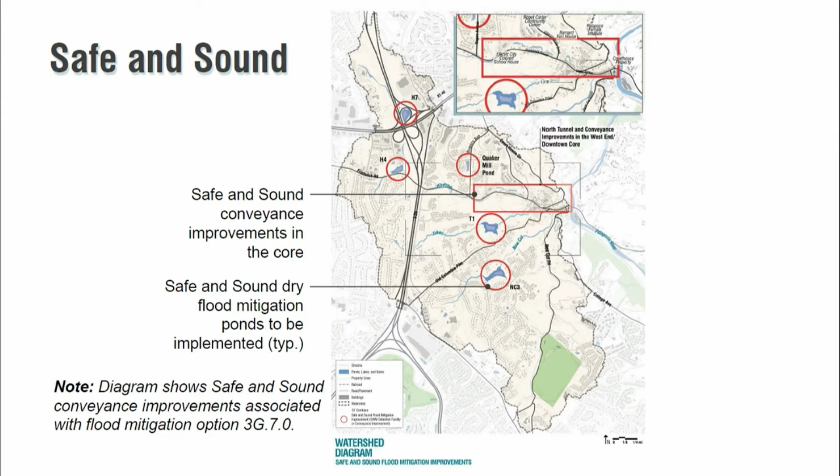This is just a map diagram showing some of the locations of the Safe and Sound conveyance improvements. The core, the rectangular box, is in the core area, including the tunnel as well as other conveyance improvements in the West End area. Then we have the dry flood mitigation ponds circled in red throughout the watershed. These are all the improvements associated with the selected 3G 7.0 concept. There are some other improvements, such as the Church Lane storm drain improvements, that aren't identified here but are included even though they weren't part of Safe and Sound.

The vision statement - the part in blue is what we had left off with last year - is that Ellicott City and its watershed is a model resilient community that thrives by protecting its people, commerce, history, culture, and natural environment.

We've added in, enhancing its vibrant and authentic character. As we looked at input and talked with more stakeholders, we had a lot in here about protecting what's here, but we really weren't capturing that we want to enhance what's here as well, so we added that into the vision statement.

Goals 2 through 6 continue over from where we left off, but we added in goal number 1, building off the safe and sound approach, protecting our residents, employees, and visitors. These goals permeate through all of the recommendations in the plan.

Now I'd like to hit the plan frameworks, these 5 main categories we'll go through, with a couple slides on each one. We're calling these frameworks because these are all aspects of the plan that are interrelated to each other.

They don't necessarily apply to one geographic area. Some of them, such as parking and flood mitigation, what you do in one area will impact decisions you make in other areas. So we wanted to talk about these more in terms of networks, so you have this framework in mind as we talk about specific areas.

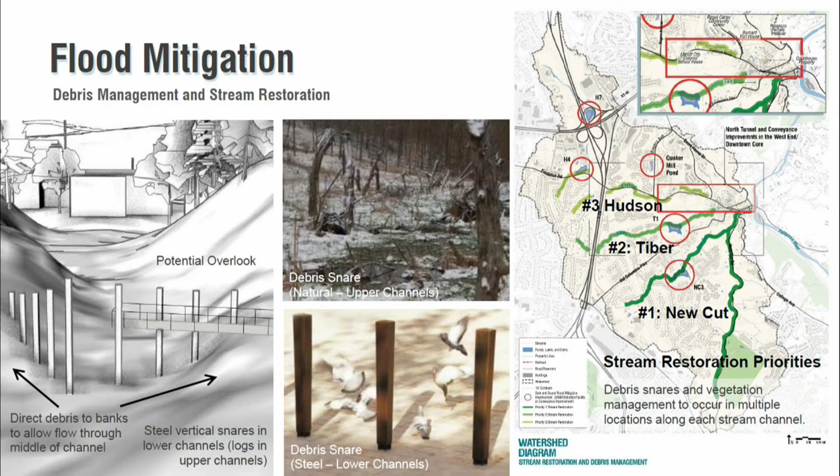With the news we saw yesterday that the Wilkins Rogers Mill site will be closing, there's an opportunity to perhaps explore a sensitivity analysis in the area of the Patapsco River. Looking at historic photos we shared in a previous presentation, the mill site has been expanded over the years.

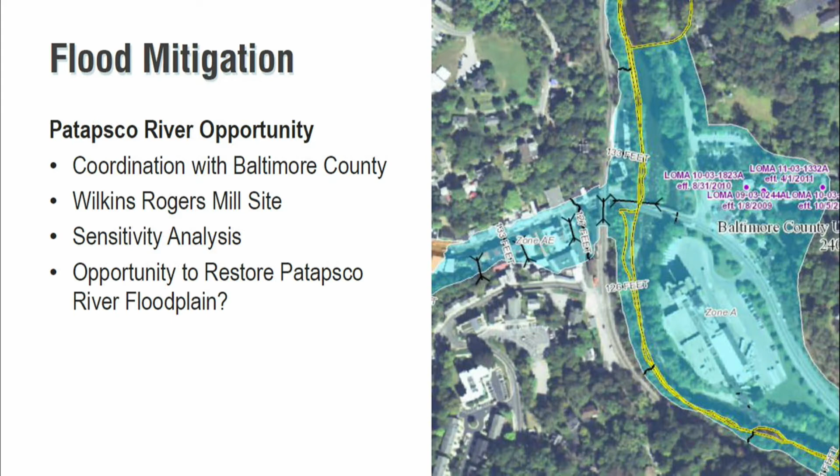In terms of environmental sustainability, we've established several guidelines here. First, uncover and restore streams that are piped below ground wherever practical, and we'll show some of those currently culverted where we see an opportunity to daylight them. When planning improvements, increase green space where possible, and employ permeable surfaces, including pavement and other green infrastructure, wherever they could best achieve environmental goals.

We've heard a lot in the online engagement about permeable pavement. One of the challenges in this watershed, especially in the core, is the granite bedrock, and permeable pavement's not going to work everywhere.

But we certainly want to, where it can work, especially in the lower part of Main Street where there's more fluvial soils, maybe in Lot D where there was a broader floodplain at one point in time and the channel has changed course over the years, there may be some opportunities to do that.

Increasing tree canopy wherever possible, aesthetically integrating environmental site design features into the surrounding landscapes, and not just treating these as engineering feats, but looking at how, where we do incorporate microbioretention, rain gardens, and other techniques, how could they really be incorporated into the landscape as an aesthetic feature as well as a functional one.

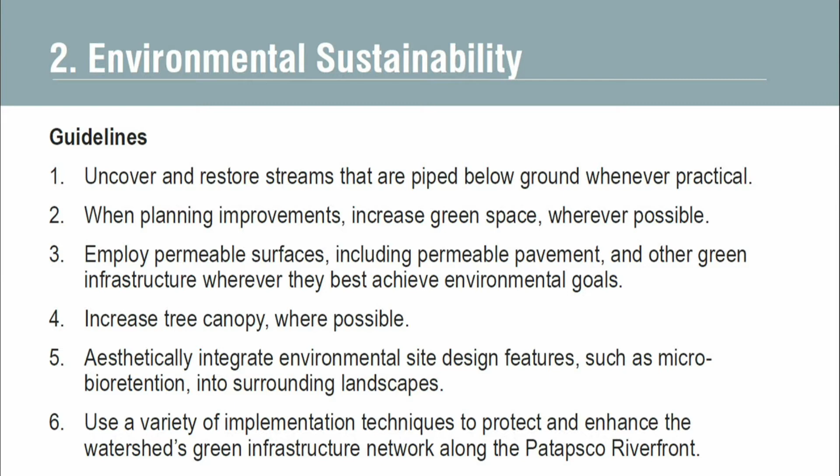And then using a variety of implementation techniques to protect and enhance the green infrastructure network along the Patapsco Riverfront. So just a number of things that we'll show where some of these might be applicable in some of the plans we're showing, but there are opportunities for green roof, permeable paving and bioretention, increasing tree canopy.

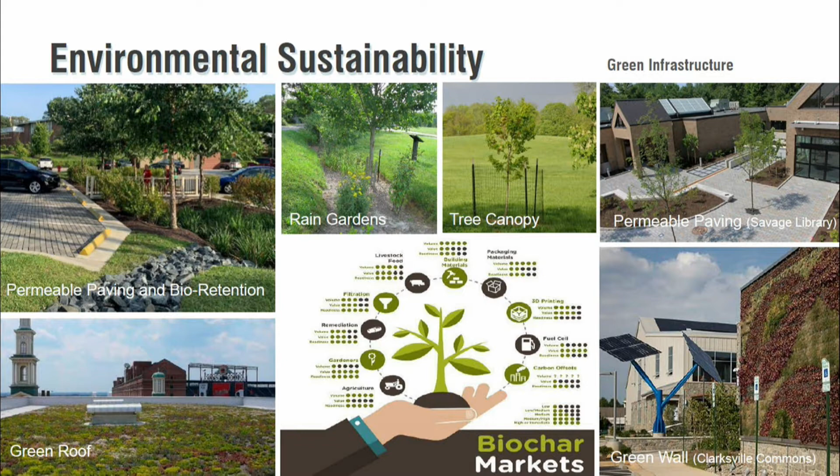We know EcoWorks and Lori Lilly are working with some, looking into biochar, the use of biochar to mix into the soil. And then green walls and pervious paving, some examples that have been done in Howard County. So we'll point out specifically where we see some opportunities.

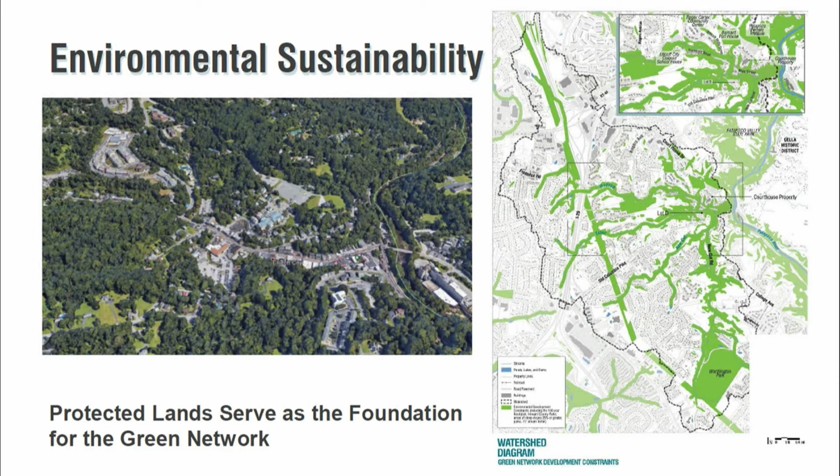And then expanding the green network wherever we can. The green network that's shown is what's currently protected lands, steep slopes, floodplain, stream buffers along the tributaries. But how can this serve as a foundation then to expand that network?

As we look at transportation and parking, for transportation, really supporting alternative ways of getting around, not just focusing on the car, but bicycle, shuttle, and really improving the walkability of Ellicott City, especially within the core, and connecting neighborhoods to the core. Making the experiences for pedestrians more enjoyable than they currently exist, and that includes ADA accessibility and more space to move around, more pedestrian area to navigate.

Making the sidewalks more accessible, linking nearby neighborhoods to downtown with pedestrian and bicycle routes. That's something we heard a lot about over the past 2 years, especially for the neighborhoods that are on the outer edges of the watershed.

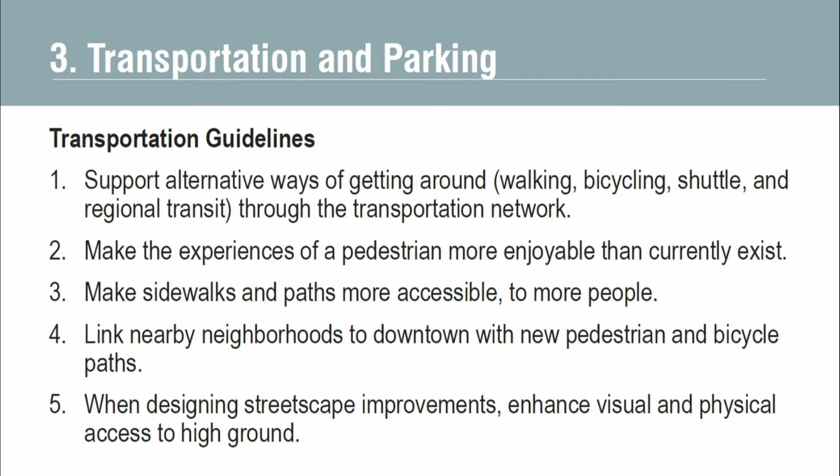And then when designing streetscape improvements, really enhancing visual and physical access to high ground as part of the safety and routes when there is a flash flood, very visible routes to the higher ground.

So looking at the broader watershed, this is based on some input from over the past couple years in a series of meetings, but along Frederick Road, Old Columbia Pike, New Cut Road, and College Avenue, where there aren't sidewalk connections out to the further reaches of the watershed, really looking at how do we extend the sidewalks and pedestrian network out there.

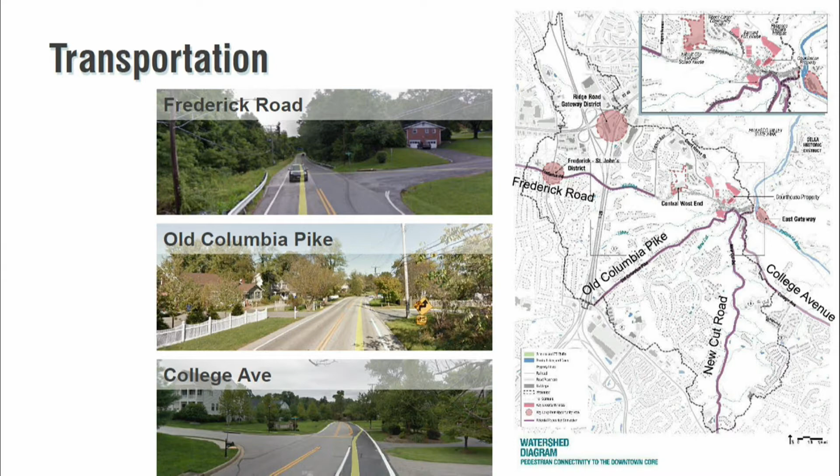One, making the core more accessible to people that live in the neighborhoods, helping to eliminate the need for driving into the core, but also just improving the health and livability of the neighborhoods.

As we look at parking, we want to be comprehensive in the overall parking strategy and considering alternative ways. So not just think in terms of parking spaces and parking lots, but what are some of the other systems that support that parking management, the use of a shuttle, making the experience of walking from the parking areas more enjoyable so that people aren't moving their cars around so much.

In the near term, restricting on-street parking where the flood risk is greatest, and then if on-street parking is restricted, accommodate those short-term needs with drop-off, loading, and delivery functions. Over time, locating most off-street parking out of flood-prone areas, and while the location of parking may change over time, planning for the overall parking supply to meet the typical demand.

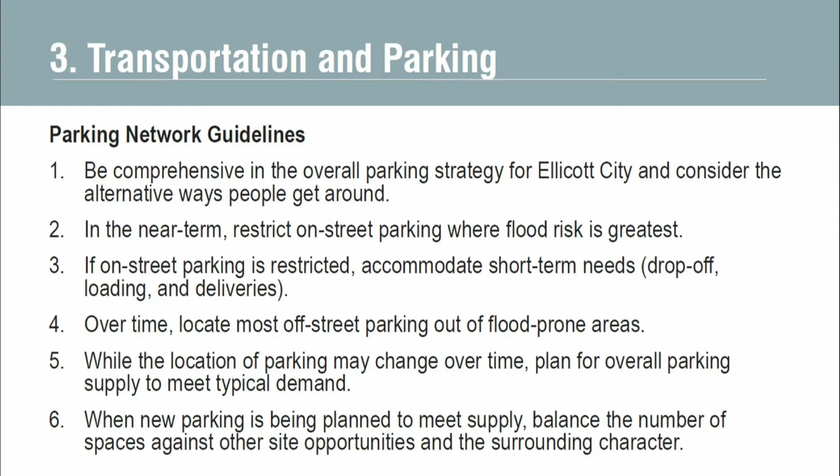And then when new parking is being supplied, balance the number of spaces against other site opportunities and the surrounding character. So as we get into that, it will make a little more sense as we get into some of the specific areas and looking at some of the alternative scenarios we have.

But just looking at the parking network at a very broad scale, if we look at the core area, we have about 900 spaces existing in the core. The red areas are areas that are potential areas for reduced parking for a number of reasons.

Along Lower Main Street, that reduction is because we still have the potential with safe and sound of over 3 feet of water in a flood like 2018 or 2016 in Lower Main. And through FEMA's research, 6 inches of water can get to the undercarriage of many passenger cars, stalling them out. 12 inches can float a car, and 2 feet of rushing water can move a car, even an SUV.

So the county is very concerned about safety. There are a lot of issues with cars jamming the culverts and so forth. So really looking at some restrictions along Lower Main Street until flood mitigation can be in place.

Lot B, that's going to be an area where we can, we'll talk more about this, that's going to be offline for construction of the tunnel exit from the tunnel outfall in the Patapsco River. So we want to look at some potential loss there.

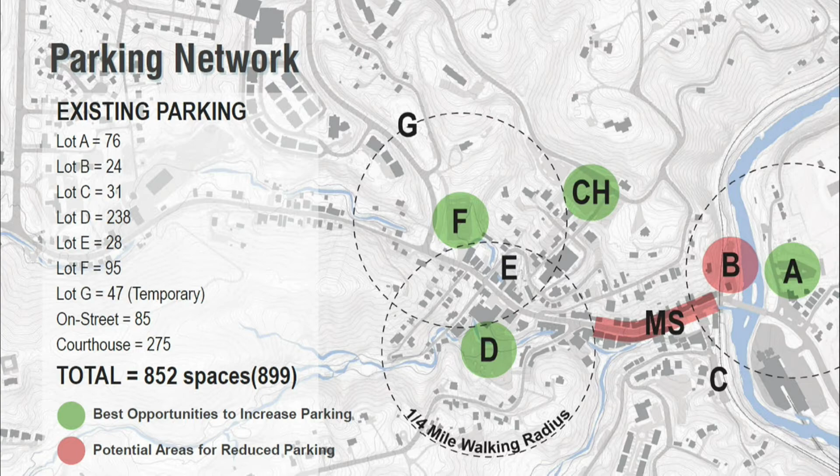The areas highlighted in green, particularly Lot A, Lot D, Lot F, and the courthouse, are really the areas where we have the ability to expand parking resources so that we can have an overall, not a net loss, but just the locations of parking resources may shift a bit. We'll talk in more detail as we get into the area plan.

As part of the network, as part of this comprehensive plan, we're looking at a number of things. A shuttle—a lot of communities are doing a shuttle, and this can't look like the shuttle bus that goes to the local hospital or mobility transit. It has to be fun, something open, something contemporary.

The top image is from Greenville, South Carolina. This is a privately run shuttle system that goes up and down their main street. And then at the bottom image, we're looking at how you can possibly even brand a shuttle here. We heard a lot about building a funicular, and that may not be feasible here, but maybe the shuttle has a fun way of being branded the funicular for Ellicott City.

Other things we talk about: valet parking, especially with the Uber trends we're seeing, drop-off and pickup becomes more important than sometimes parking, but also having valet. The bottom left is in the Hampden neighborhood of Baltimore, where on weekends they implement valet parking.

And then looking at some restricted parking on the signs that maybe in the flood-prone areas of Lower Main Street, it's loading and unloading—perhaps a 15-minute limit for just convenience, run in and get a cup of coffee or pick up something. Maybe once flood mitigation's in place, we start with 2-hour restricted parking, and that may expand to paid parking for the most desirable spaces.

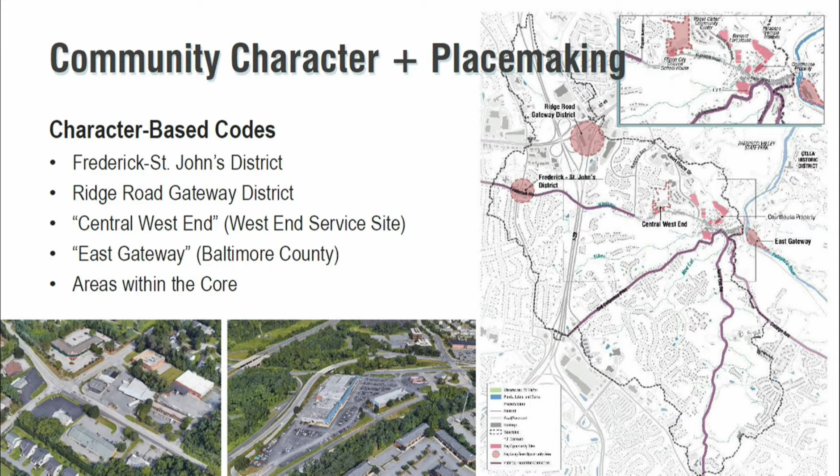And then also in some key redevelopment sites - there's no intention to redevelop these now that we're aware of - but at Frederick and St. John's, the commercial district there in the lower left, and up at the Ridge Road Gateway District, if these sites are ever redeveloped, developing them in a different way that creates more walkable places and reflects the character of the district.

Also looking at guidelines in the character codes that's starting to design buildings to fit the site rather than the site to fit the architecture.

So those are things the character-based codes can get into, to really look at the architecture fitting the sites. And then looking at the open spaces.

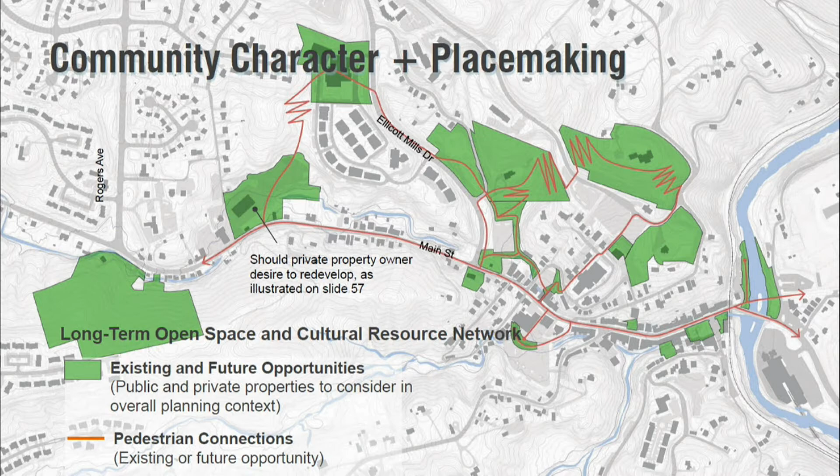This shows in green a number of open spaces, both existing and potentially new ones, and cultural resources such as the Patapsco Female Institute, the Roger Carter site, the Barnard Fort House, and so forth, along with some new open spaces associated with flood mitigation in Lower Main. We need to look at the master plan to connect these comprehensively with pathways and open space—a green network—so they become part of an overall network rather than a bunch of individual sites.

And lastly, under character and community character and placemaking, we want to make sure that wherever we're making projects or implementing improvements, we look at how we can make these great places to be, activating them with the right uses, allowing events to occur, and taking advantage of the intrinsic qualities of these spaces. So with that, we wanted to have ten minutes of Q&A on some of these topics, if anyone had any questions or comments on these broad guidelines.

Again, we'll keep these guidelines in mind as we go through the individual sites.

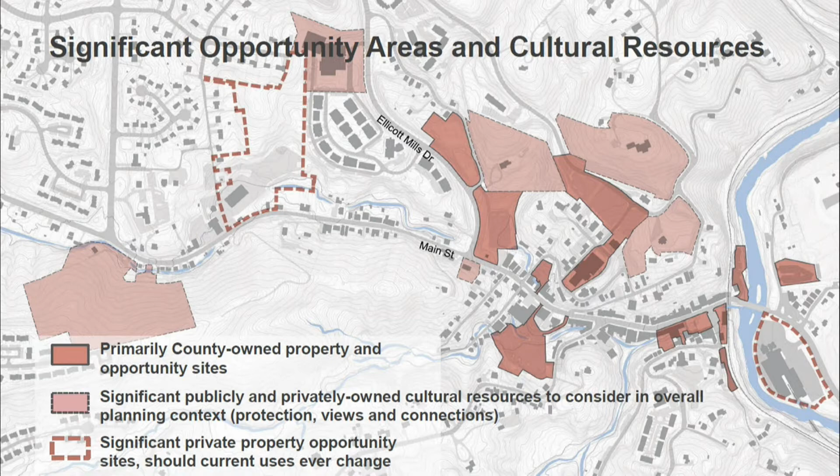A year ago, we didn't anticipate that mill would be closing so soon. We had always identified that as a far-off opportunity, but it's something we need to keep on our radar right now. So we're going to go through each of these areas.

We'll start with Streetscape and then start at the West End and work on down to the Riverfront.

With the Streetscape, some important guidelines we want to have here is that we want to really design the streets, sidewalks, and those associated pedestrian areas to be simple, consistent, and authentic. That's very important in the historic district - they're not trying to be something that isn't Ellicott City, that they're consistent throughout and there's an authenticity about them.

But we also want to use flood resilient materials and construction methods. So the timing of the streetscape with the flood mitigation projects becomes very important as to what the materials are.

And how they're constructed. We want to integrate visible and audible emergency alert systems into the design of the streetscapes. That's very important in conversations with the Office of Emergency Management, that these systems are incorporated, that they're not add-ons, but they're really thoughtfully incorporated into the street system.

And then we want to consider the potential impacts from storm debris in the design of streets, sidewalks, and the associated pedestrian areas. So, thinking about if storm debris comes down, how do some of these street elements keep them from going into the channels, or how are they anchored down so that they're not destroyed?

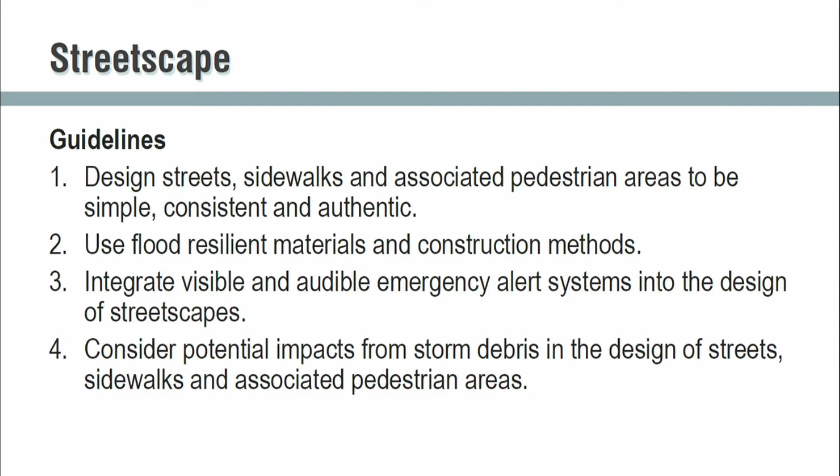This is a diagram that we had shared last year, looking at starting at the west end, expanding the sidewalks further along Frederick Road, improving some of the sidewalks. We heard a lot of desire to rename this section of Frederick Road to Main Street, so it's a continuation of Main Street, and Frederick Road may start at 29 and going further.

A traffic circle at Rogers Avenue to really create a boundary between coming in from the west - you hit Rogers Avenue at the traffic circle, and at the west end you're entering a new district - having a series of bump outs and crosswalks along here, introducing a number of crosswalk or traffic calming techniques throughout the west end.

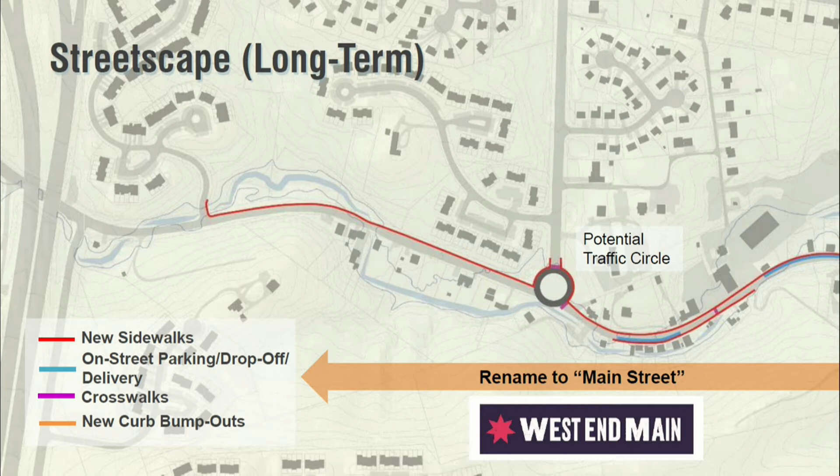That was something we probably heard most in our conversations with the residents of West End - the desire to slow traffic down through there and make it safer for pedestrians and parked cars in that area.

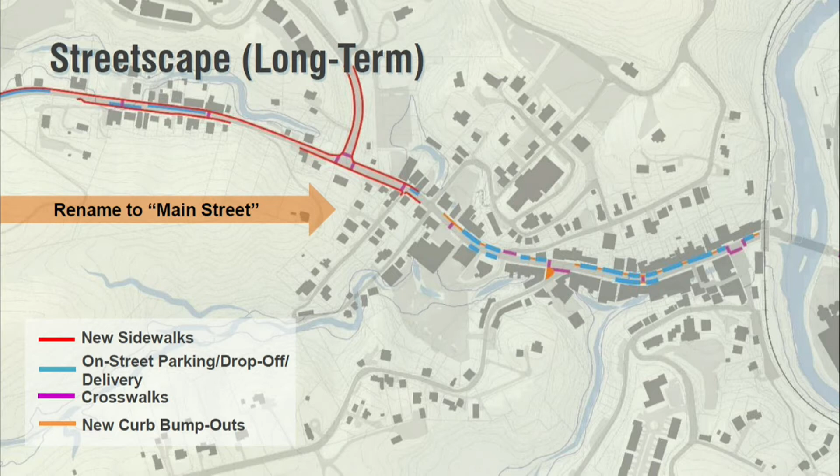As we move further into Main Street, again, continuing new sidewalk segments, and then showing areas in blue down in the core of areas on-street parking, drop-off, and delivery, introducing several mid-block crosswalks and better crosswalks at some of the intersections within the core, and then some new curb bump outs. We'll show more details of this as we get further into the planning.

In the West End, this was a sketch we had last year that hasn't really changed, looking at opportunities to create some bump outs, some raised crossings, crosswalks, create some safer parking zones, and then looking at alternating some of the parking areas.

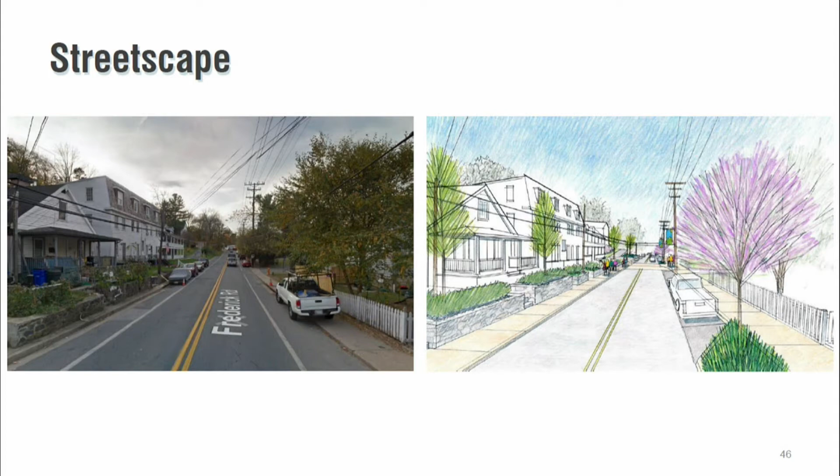There might be some areas where you could do it on both sides of the street, but in most cases it's probably going to be alternating because of the width of the street there.

As we look at the core, historically there's really a very simple geometry to the street in Main Street. There is the sidewalk zone, the parking zone, and then the travel lane zone.

And as we look at streetscape improvements, especially as we start to talk about bump outs and curb extensions, we want to try and respect this simplicity here and not have a streetscape that visually is going in and out and loses that simple geometry there.

So these are just very simple diagrams showing how if we do introduce bump outs, you can see the curb line introduced there, that the sidewalk materials may reflect what's happening in the drop-off or parking lane, or the parking drop-off lane could match what the sidewalk materials are. We'll show that in the next couple slides.

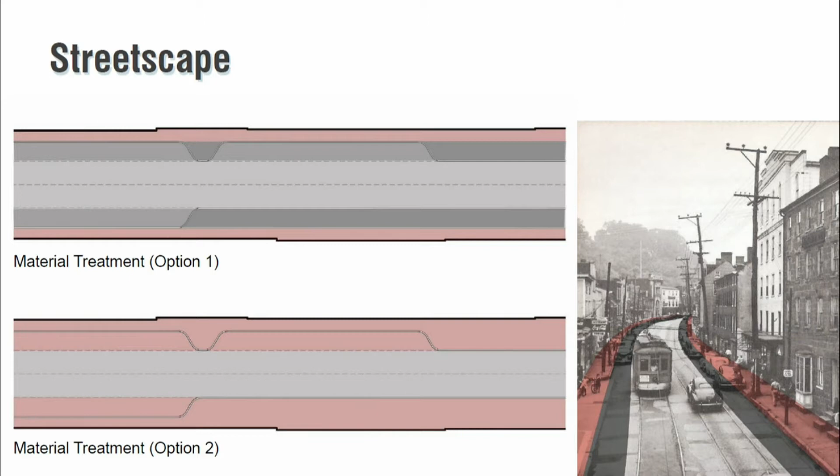This is a more detailed plan showing that before flood mitigation, we're really continuing to recommend the use of scored concrete with granite curb, to really withstand - they are more resilient to the flood waters than the brick. So any streetscape that's done before flood, before the safe and sound, we recommend concrete.

But this is an example showing how the bump outs and extended bump outs could be used to create some outdoor amenity space, some seating areas, and then define some of those drop-off, pickup, and valet areas. And then the paving of that drop-off zone might reflect the paving of the sidewalk area so that we maintain that simple visual geometry along the side.

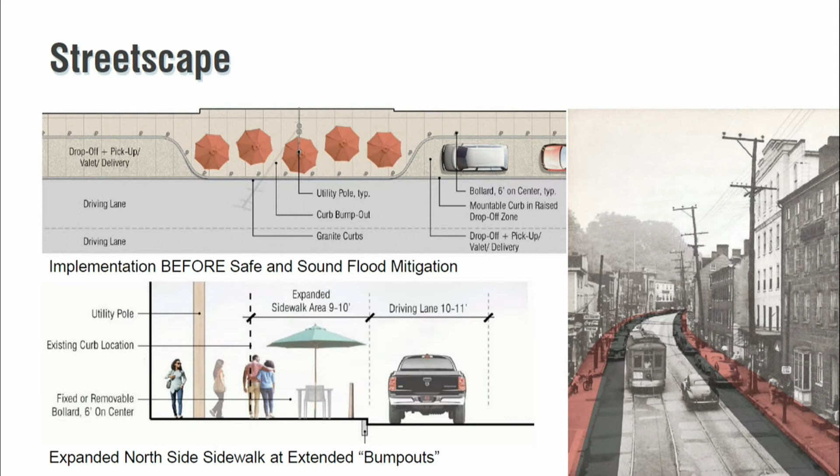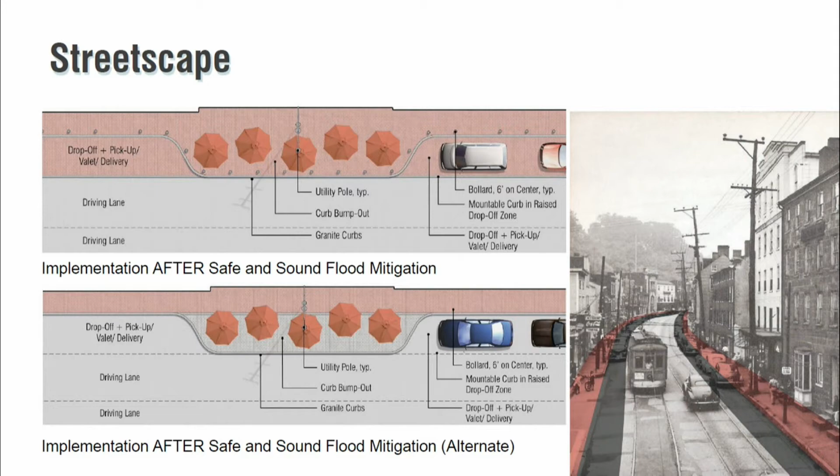Now, post Safe and Sound flood mitigation, the shear stresses would be reduced down enough that we could look at brick sidewalks, reintroducing the brick sidewalks, and that could even extend into this valet pickup and delivery area, or it could just be occurring along the sidewalk area as the shear stresses would be lower. This is just an example of how some of those bump-out areas could be incorporated into the streetscape without getting a very busy visual in and out of the curb line moving back and forth.

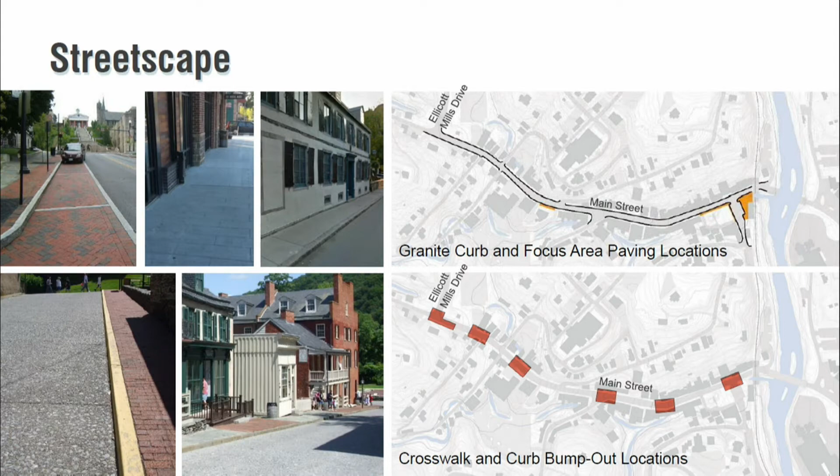In cross-section, we talked a lot last time about doing these flexible zones where the drop-off area could be brought up to street level, with bollards separating them from the sidewalk area. Most of the time this is a drop-off zone, but during special events it becomes an expanded sidewalk area. We think the best area to do this would be at Lower Main.

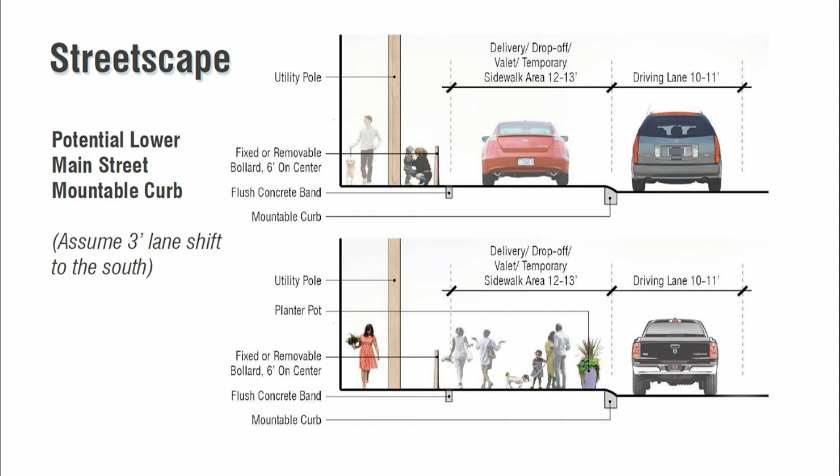With the four buildings coming down on the south side of Main Street, there's an opportunity to shift the curb line a little bit so that we could get this drop-off zone to be 12 to 13 feet wide, which would be adequate distance so you're not stepping out onto the rolled curb. So that would be Lower Main, where we see this concept working best.

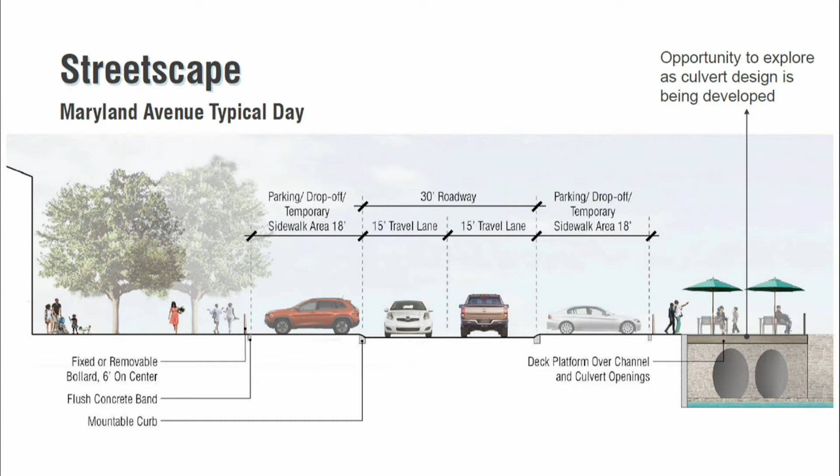We also see the opportunity at Maryland Avenue with the pull-in parking spaces to bring them up to street level, so that most of the time it functions as it does today with pull-in parking and two drive lanes. But then during special events you could close that parking area and it essentially becomes expanded gathering and event area.

We're also showing, to the right here, with the introduction of the Maryland Avenue culverts as part of the Safe and Sound Plan, the opportunity to cantilever over that part of the channel by about 15 to 20 feet to expand the usable sidewalk area there. This is an opportunity to explore as the culvert design is being developed to make sure it is feasible. While the tunnel team and the culvert design team's design work is underway, we want to make sure this opportunity is looked at.

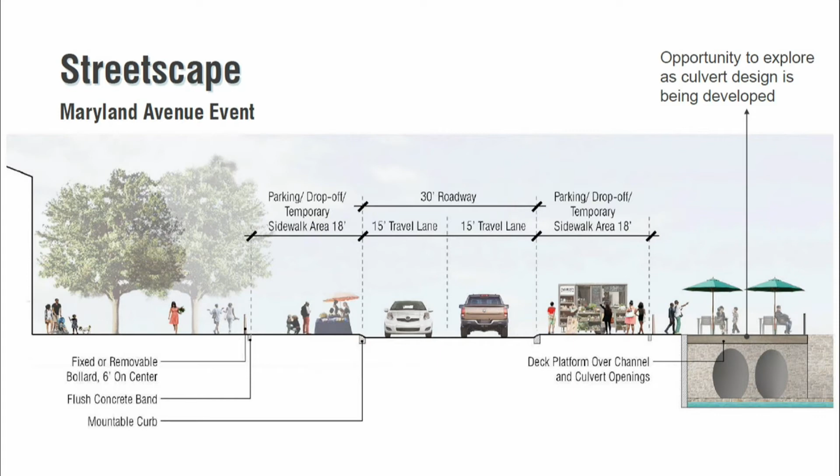As we look at the West End, we already talked about considering the extension of Main Street through the West End, really looking at it as an extension of Main Street for streetscape planning, incorporating traffic calming into the streetscape improvements throughout the West End, and then planning for long-term opportunities related to the West End service property should the current use change. We don't know of any plans to change that use now, but this master plan is a long-term plan, so we want to put some frameworks in place should that use ever change.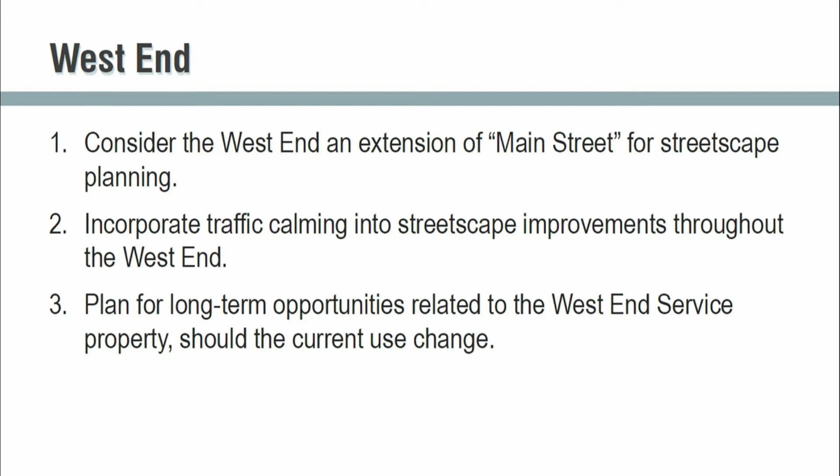And we look at this, we've scaled back from what we were showing last year in the master plan that showed more illustrative detail, and we zeroed down to what are some of the most important elements if this property were ever to change.

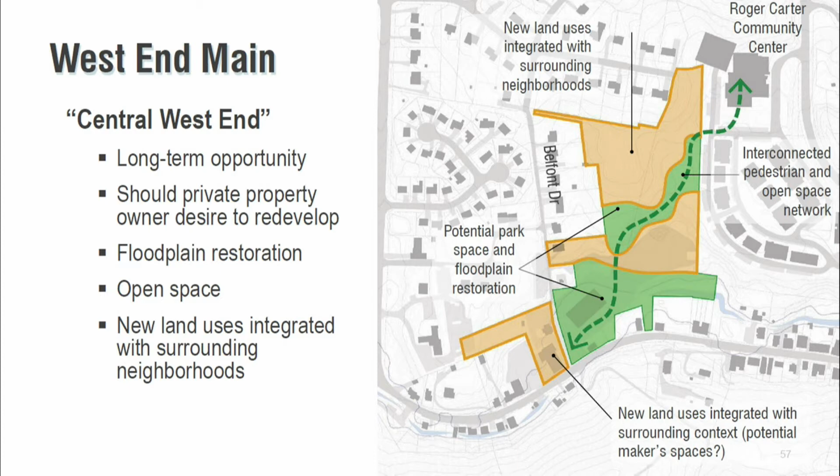Some improvements include restoring the floodplain area where the current West End service building is located, creating more green space, and restoring that floodplain. We're also creating a green network and connection to other amenities such as the Roger Carter Center and the broader pedestrian network, and looking at appropriate sites for new uses that are integrated with the surrounding neighborhoods. Some of the existing service buildings might even be reused as maker space, something we talked about last year, becoming a center focus for the West End.

As we move further east, the Ellicott Mills Gateway area, which includes Lot G, the Barnard Fort House, and Lot F, is where we start to get into the meat of some of the safe and sound improvements related to the tunnel entrance.

We want to make sure the tunnel entrance seamlessly blends with its surroundings as much as possible, and it needs to be designed to minimize risks to people. The tunnel design team is currently working with the county in developing that. We've been working with them to understand this, and at this point we don't know exactly what it will look like, but we have a general idea of where it would be located and the size and area required, so we can incorporate that into our planning. The details are still being developed.

When planning any new structures near parking lot F, we need to consider and reduce potential visual impacts on the Barnard Fort House and the Heritage Center, and use sidewalks and paths to interconnect parking areas with heritage resources, including the Barnard Fort House and the Thomas Isaac log cabin. We want to design the surrounding area of the log cabin as an integral part of the gateway entrance to Ellicott City.

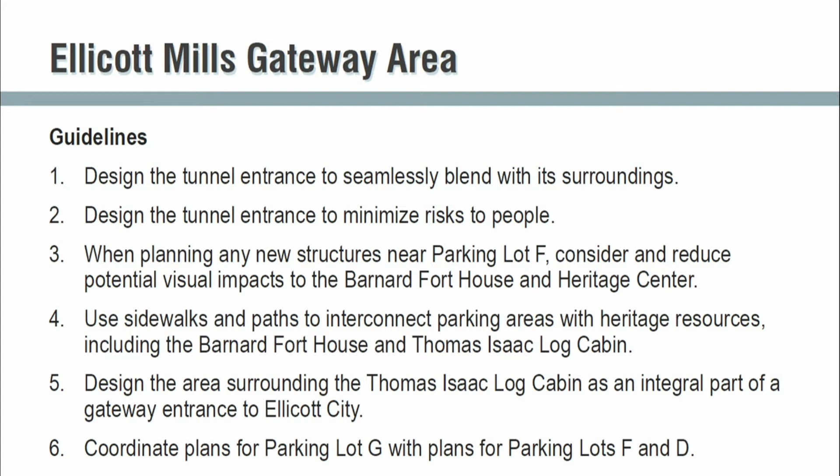Coordinating plans for parking lot G with lots F and D is important. If you remember that diagram with the red and green dots over all the parking areas, if we reduce parking in one area, we may have to increase it in another, so we want to look at these areas in concert with each other.

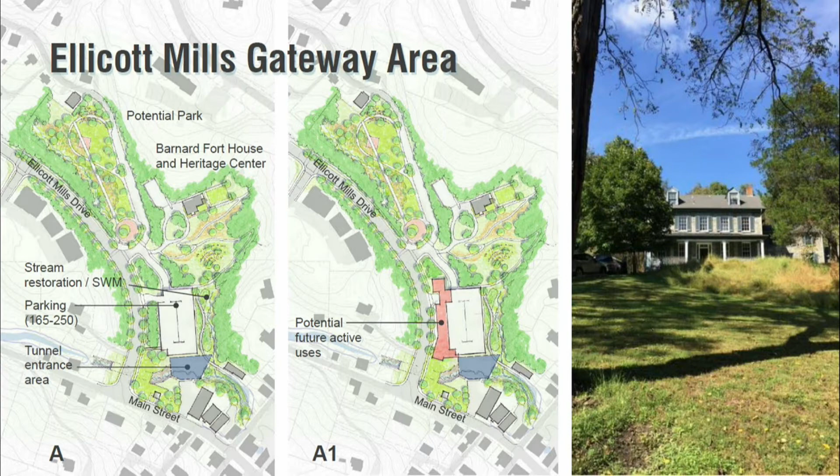So as we look at Ellicott Mills, Lot F, and Lot G, I'm going to zoom in on some of these areas in more detail. At a high level, the shaded trapezoid at the bottom is the tunnel entrance area—roughly where it would be located and roughly the size needed for that to occur. We wanted to show that in context with some other parameters.

In this case, we're looking at a parking deck, which depending on whether it's 2 or 3 levels, could accommodate anywhere from 165 to 250 spaces. An important aspect is this: to the right, where we have the existing stream channel, we want to expand and restore that stream channel and create pedestrian connectivity from Court Avenue up to the Barnard Fort House. So however the tunnel entrance is designed, we want to maintain pedestrian connectivity up through there.

In Scheme A1, we're showing this deck built roughly on the footprint of the existing surface parking lot, with the west edge preserving the trees along Ellicott Mills Drive. That setback would allow in the future the addition of active uses along the garage face, so you have more active uses along the street versus just a parking garage. When we talk about introducing new uses, it's not just about development for its own sake, but reinforcing this as a walkable community—having active uses along the street edge is an important part of making it more walkable.

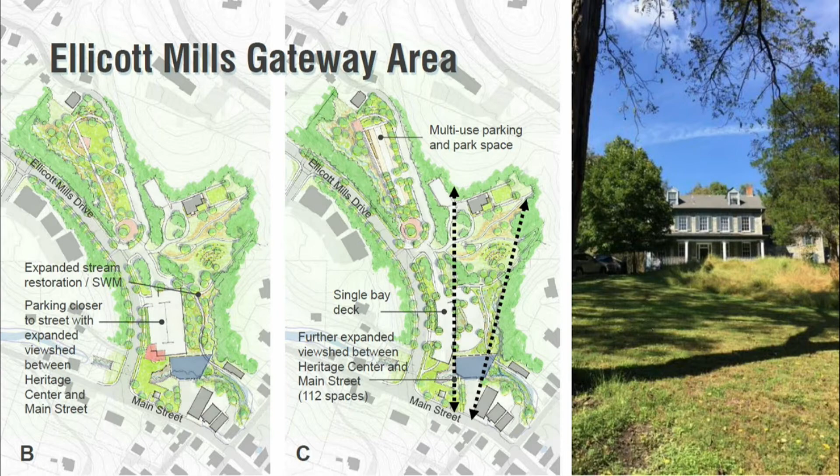Scheme C shows a single bay deck with an upper deck and a lower deck built into the hillside, with surface parking over the remainder of the lot. This maximizes the view corridor to the Barnard Fort House, but results in fewer parking spaces, so in that scheme we'd probably want to keep more permanent parking in Lot G.

And I'll go into each of those in detail. So this is zooming in onto one of the parking deck schemes, showing how we shifted the plan, so now north is to the left.

You can see the tunnel entrance area. It would be designed so we maintain the base flow of the stream through there, and this would be the entrance into the tunnel, with a portion covered and going underground, but those designs need to be worked out. You can see the pedestrian connection we want to maintain to Court Avenue, and the area for some stormwater stream restoration along the east side of parking lot F.

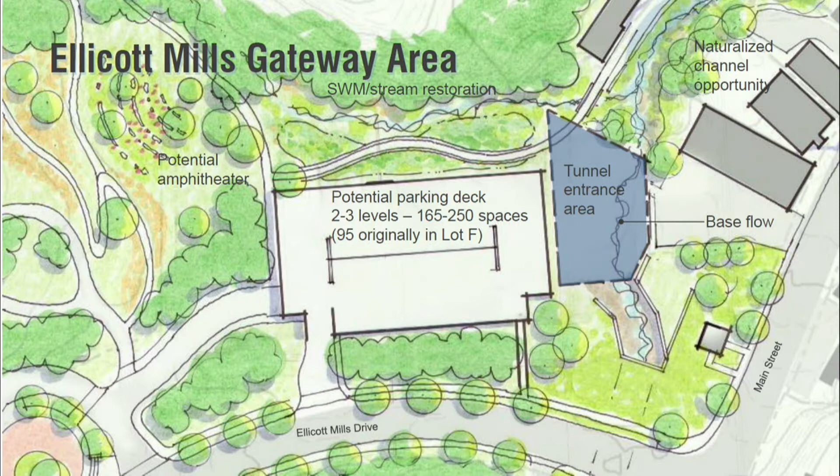One of the ideas that came out of the online engagement was incorporating an amphitheater onto the hillside in the Barnard Fort House grounds. We thought that was a great idea, and we're showing that. We talked with Rec and Parks about this idea, and they really liked it as well.

Again, these are master plan concepts. When this becomes a real project, the details would need to be worked out in the design.

But then this is a scheme where if we did keep parking in this lot, as I talked earlier about trying to keep multi-use for some of these spaces, the parking lot could be designed as a parking lot most of the time, but park and event space some of the time. There might be an opportunity for the spaces to be permeable paving, with some demonstration projects occurring here, and planting trees in an arrangement that creates outdoor rooms, so you could keep a smaller portion for parking and close off the larger portion for an event, while still having park space around the perimeter.

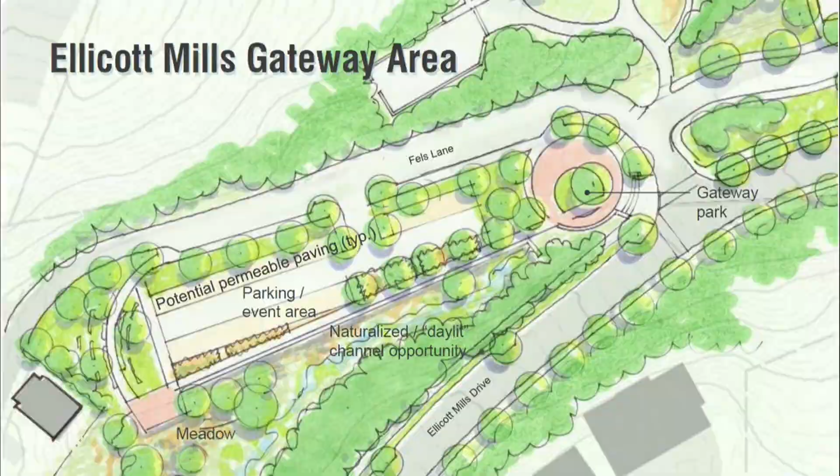As we move to Lot D in the upper main area, we want to look at redesigning parking Lot D to really incorporate environmental site design features as much as possible, such as micro-bioretention and more canopy and green space. If expanding and naturalizing the existing stream channel in Lot D, we want to design that expanded channel to really serve as a public park and gathering space, so it can be a real amenity and leverage other benefits to the master plan.

Any new structures in Lot D, we want to minimize impacts to the overall quality and flexibility of that space. We want to consider views and vistas in the design and enhancements to Lot D, and allow and accommodate public events and celebrations to continue. They might not occur exactly as they do now, but we want to make sure they can be accommodated in the future.

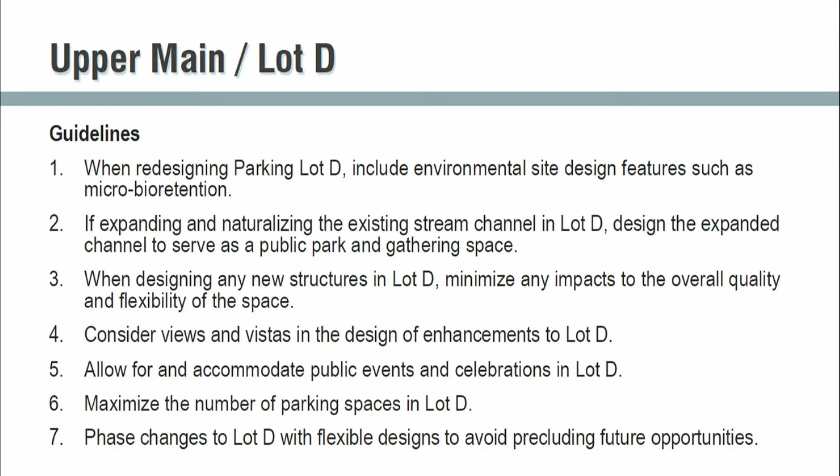We want to maximize the number of parking spaces in Lot D, as this is a centrally located parking lot, but we also want to balance that with other requirements in Lot D. We want to phase those changes to be flexible, so whatever we do in the short term doesn't preclude future opportunities.

One of the things we heard a lot in the online engagement was a desire for more green and naturalized channels. They're really in the core of Ellicott City, and there's not a lot of opportunity to do this unless we restore the floodplains as well. To restore the floodplains, we'd need to take down a lot of historic buildings. So a lot of these channels need to remain hard surface because of the floodwaters, velocities, and shear stress that come through here.

However, we have identified some areas where we could do more of a naturalized channel. In Lot G, I already talked about the area where we could daylight that channel. In Lot F, to the east of the parking lot, we can enhance that stream channel.

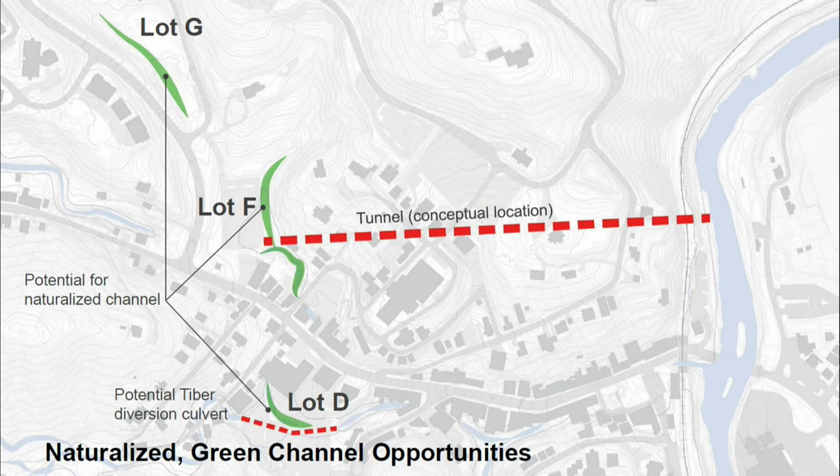The area of the Hudson below the tunnel entrance to Court Avenue could be naturalized more, since floodwaters would be diverted to the tunnel. There's also an opportunity in Lot D, provided we introduce a diversion culvert for the Tiber to tie into the Hudson further east, allowing a good section of any daylighted channel in Lot D to be naturalized and green, since we'd be diverting the stress of the floodwaters.

So we've looked at a number of options in Lot D. Since it's no longer required for flood mitigation solutions, these are probably much longer-term concepts than what we were showing a year ago. On the left is the existing conditions, and that's certainly an option to leave parking Lot D as it is, with the number of spaces it has now.

Scheme A shows keeping it as a surface lot, reorganizing it, introducing more tree islands and more tree canopy, then widening that channel and introducing a green amenity channel through there. I'll zoom in on some of these in the next couple slides. That certainly has an implication with number of parking spaces, so we would lose spaces there and need to pick them up somewhere else, whether it's Lot F, Lot A, or the courthouse lot.

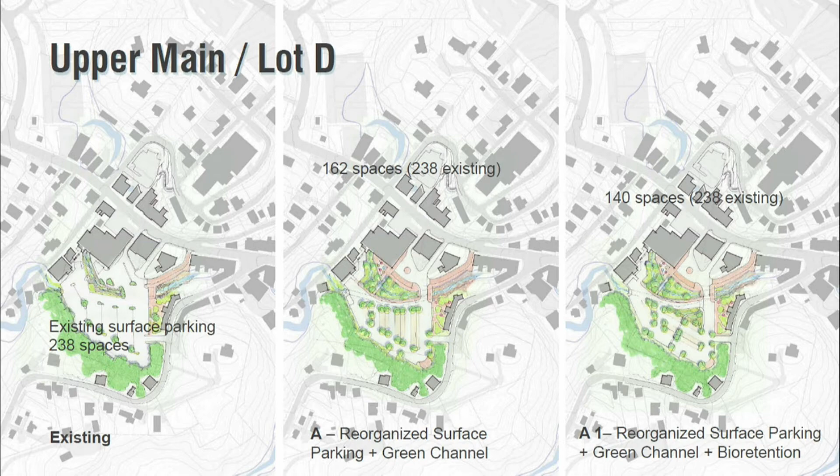Scheme A1 is really another reorganization of surface parking, introducing some bioretention that could also become an amenity for that space. Schemes B and B1 show the ability for a future parking structure. We'd still encourage that if there is a parking structure there, wrapping it with some active uses, especially if we're going to invest in making the stream channel an amenity area.

That amenity adds value to any uses along there, but more importantly, those uses—restaurant or other uses—would help activate that amenity and add value to it by putting people there overlooking it. For the parking structure, last year we showed solar panels on the deck. It could certainly have a green roof instead. It could be a 3-level deck with a green roof or a 4-level deck with solar panels.

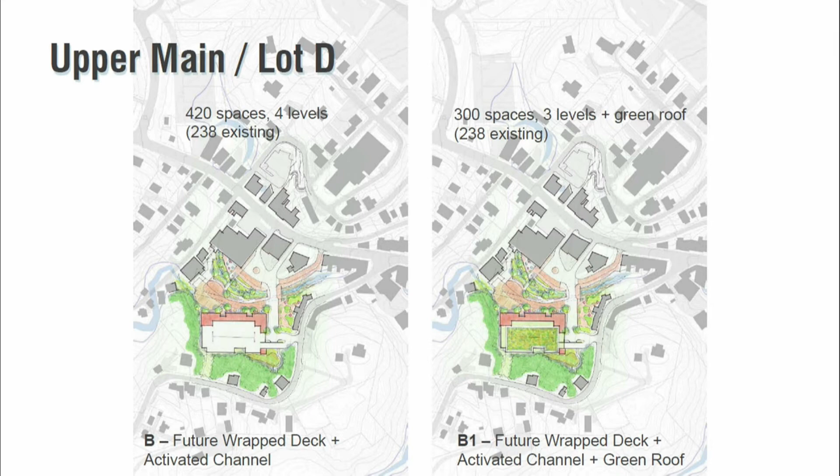So there are several options. Again, we're not getting into the detailed design of this, but we think there should be flexibility maintained, especially once the tunnel is implemented. The actual floodplain in Lot D, the floodplain limits would likely change, increasing the usable area for this lot.

So this is just zooming in on one of the surface parking schemes that introduces some bioretention. It also shows how the channel can be widened. This is a channel that is mostly naturalized—we could introduce a lot of plant material in green because we wouldn't have the floodwaters coming in here. It's a little hard to see, but the dashed line shows the potential diversion for the Tiber, which would run parallel to this and tie in just underneath the road crossing into Lot D.

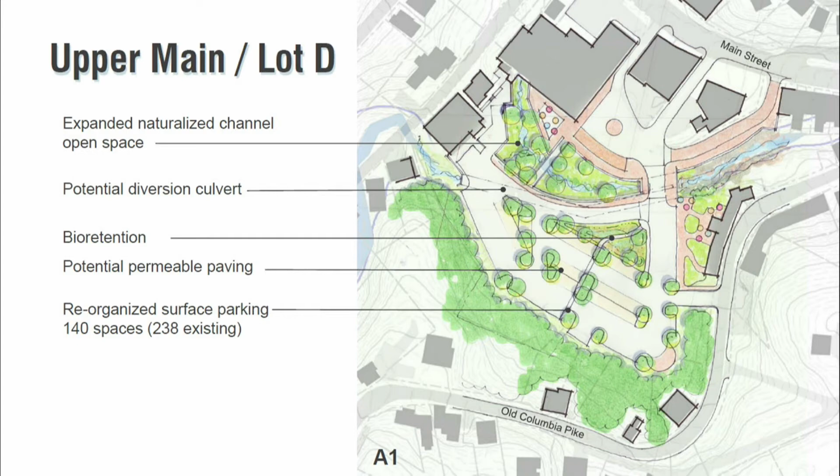This scheme shows the activated channel. It isn't mutually exclusive with development in Lot D, but because we don't have floodwaters in this channel, we could safely allow people to get down into it and interact and engage with the water. There could be some ramps down there. It could still be mostly green, but providing some opportunity there.

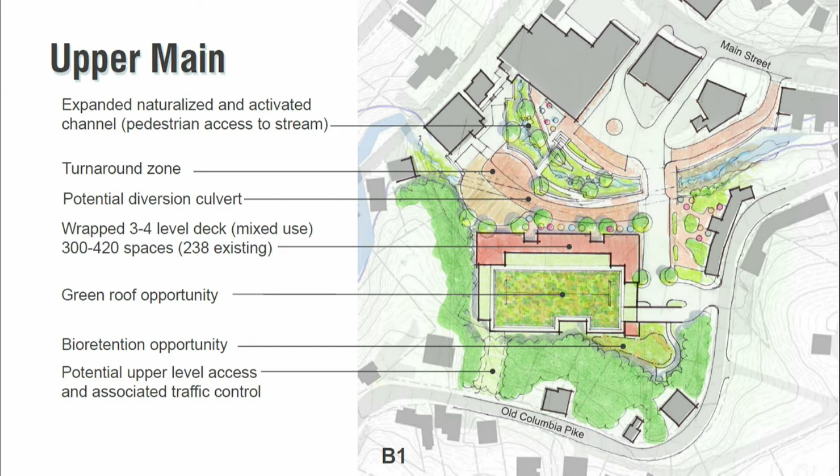But we think that if there is a parking deck added here and wrapped with some active uses, this could really serve as an amenity feature, and that activity could help activate that open space. That would be an investment. We're recommending a parking structure be set back to the rear of the lot as much as possible to preserve as much open space as possible, still allow events, and still allow that open spatial quality that we have in Lot D.

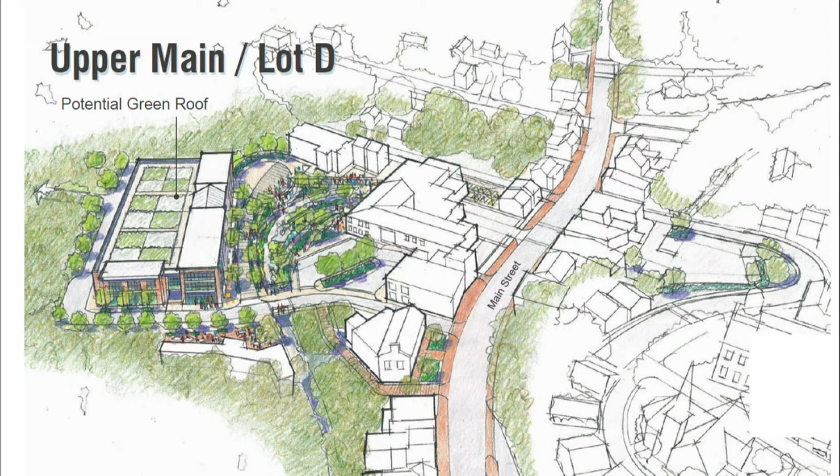This is a slightly modified sketch from before, no longer showing any changes to Lot E. We're showing the green roof on the deck, looking at maybe a 3-story wrapped use around a deck, showing that activated channel and how the two could work together and leverage each other. This could be a smaller deck with a smaller footprint, and the uses could be different, but this is just a conceptual plan that we're recommending leave the flexibility for in the future.

As we move up to Courthouse Hill, this really hasn't changed since last year, but some guidelines reflect on one of the things discussed earlier. We want to incorporate in the redevelopment a mix of uses that complement and support Main Street businesses and the adjacent historic attractions, so really be complementary to what's happening along Main Street, Mount Ida, the Patapsco Female Institute, and the Barnard Fort House.

Through site design, we want to establish interconnected street and pedestrian networks that provide clear connections to Main Street and those surrounding resources. We want to enhance the visual and physical connections to Mount Ida and the Patapsco Female Institute, and disguise and wrap any parking structures with active uses, while making sure there's a public parking component incorporated.

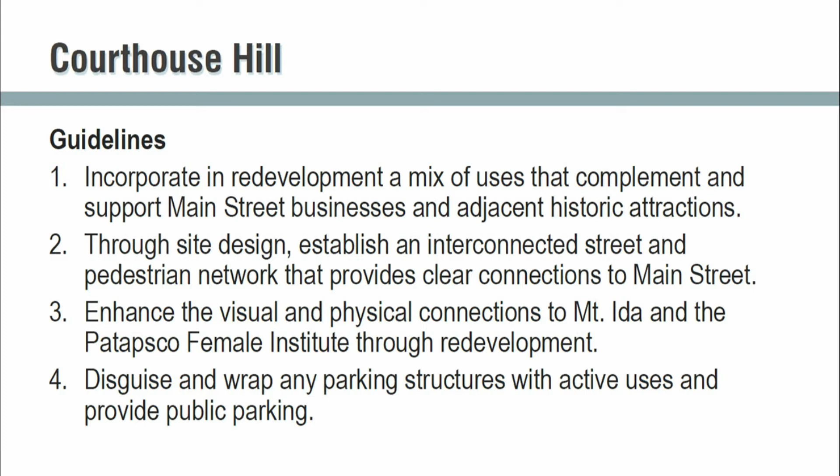These are a series of guidelines that, when the county issues an RFP for this site, would go into that RFP. This example hasn't changed since last year, but shows how redevelopment could occur, creating a clear street network that connects. There might even be a parking structure or building using some upper levels to bridge over and create a connection to the Patapsco Female Institute at that upper level, making it more accessible and giving more of a front door presence for Mount Ida.

As we move to Lower Main, we're probably going to see most of the changes in the plan. We want to look at a couple of things here. We want to restrict public access to the channel to minimize risks to people, emphasizing safety. This is a much smaller space now, and since we have the opportunity to safely engage with the channel in Lot D, we want to maximize the pedestrian area above the channel in Lower Main and not provide that access to people in the channel.

We want to design the stream channel, culverts, and surrounding space to serve as a focal point, inviting people to view the Tiber, and also a focal point to the B&O Railroad Museum. We want to incorporate historic building elements in the design to the extent practical and to the extent they can be protected from damage. We're not determining all of those now, but want to lay the groundwork for that to occur. We want to use materials and design compatible with the historic channels and surroundings, maximize views to the B&O Railroad Museum, accommodate various events and celebrations as multifunctional public spaces, and provide access to high ground wherever possible.

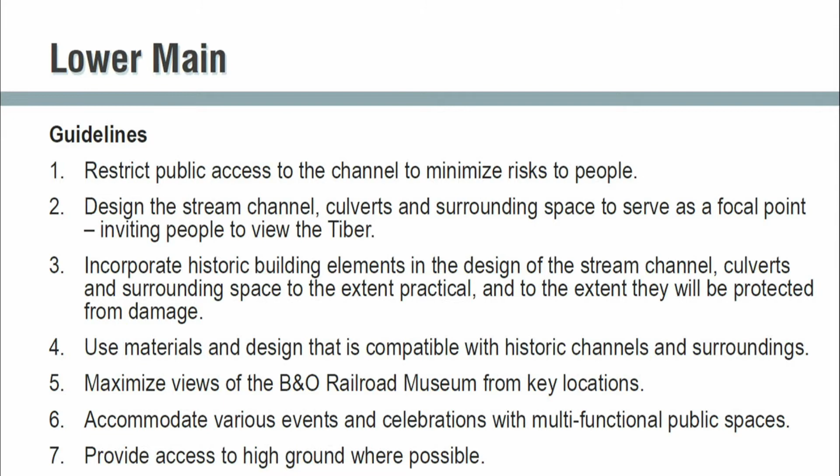So this is a plan view scheme we're looking at. To the right is the lower channel at Maryland and Main Street, where the four buildings are planned to come down. This is the channel design and dimensions received from McCormick Taylor. You can see the umbrella tables and the area extending over the Maryland Avenue culvert entrances to expand the outdoor gathering area off of Maryland Avenue. To the left of the diagram, at Caplan's building, there are existing beams and a rear brick wall on the other side of the channel that could potentially be preserved.

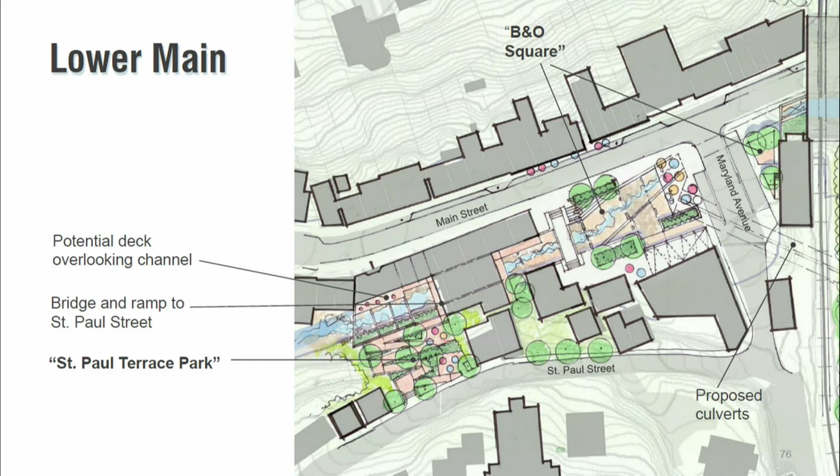Incorporating those features, along with an upper level deck and pedestrian access, would allow access from the upper floors across the channel to St. Paul Street. The county owns land leading up to St. Paul Street, so that could almost become a St. Paul Terrace Park, introducing trees and green space, along with a ramp and access system up to higher ground. We have some sketches that will show this in more detail.

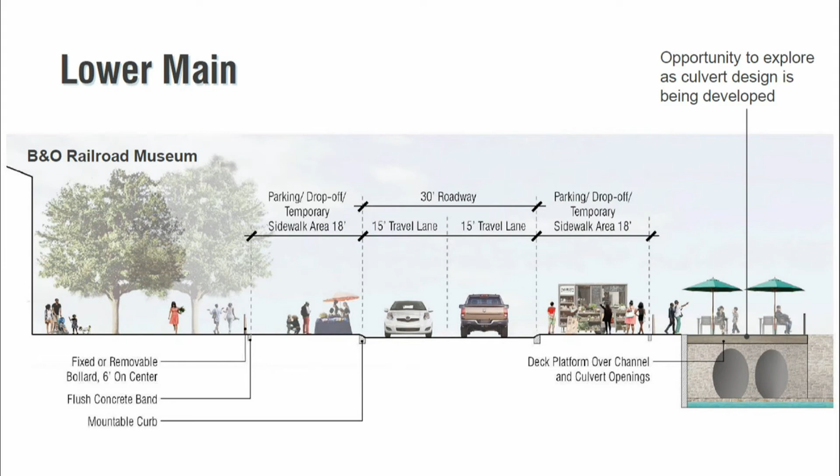Again, this is the diagram we showed earlier of Maryland Avenue, showing how that expanded sidewalk area could be used, and a potential expansion over the culvert entrance at Maryland Avenue, if that's feasible with the tunnel or culvert design. Looking at a perspective view, this is the same view angle we had last year, but showing the remaining buildings and the buildings that would be sliced off.

You can see with the Caplan's building, the beams that would come over across the channel at the second level. This is a little deceiving, it looks like they're a lot lower than they are, they would be at the second level, showing some outdoor balcony space along there, as well as the bridge access along the upper stories of Shoemaker, Caplan's, and the other buildings to that terraced park on St. Paul.

Paul Street, and then the lower end of the channel showing some terrace steps, but not accessible down to the channel, though that would break up what's about a 13 to 14-foot high wall channel depth there, breaking up that sheer drop with some terraces.

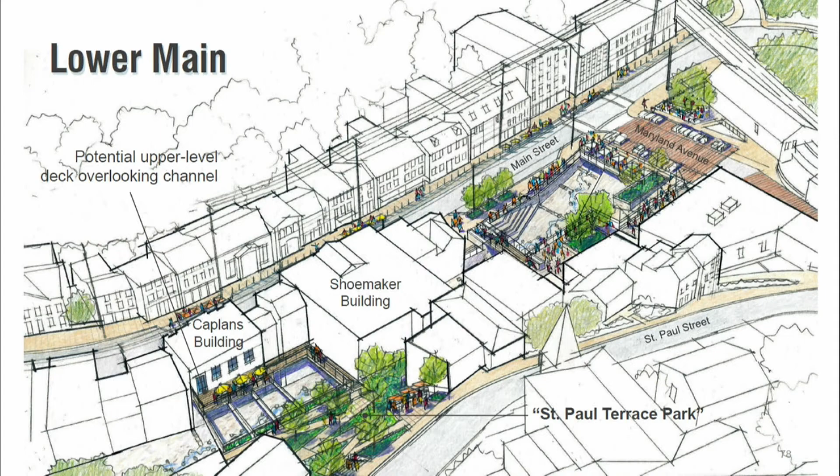For visual interest, zooming in on the St. Paul Terrace Park, you could get a better idea of the upper level decks and the terrace walls, how that can become an amenity leading up to St. Paul. The rear facades are going to be very important in how they're treated.

As we look at the lower part of Main Street, again a better sense of terraces. We would like to get in a pedestrian bridge crossing there, roughly where Tiber Alley comes across now. It would likely have to be elevated 14 feet above the channel basin to allow floodwaters underneath. We're not sure it may or may not be able to have ADA accessible ramps up to there. That has to be looked at.

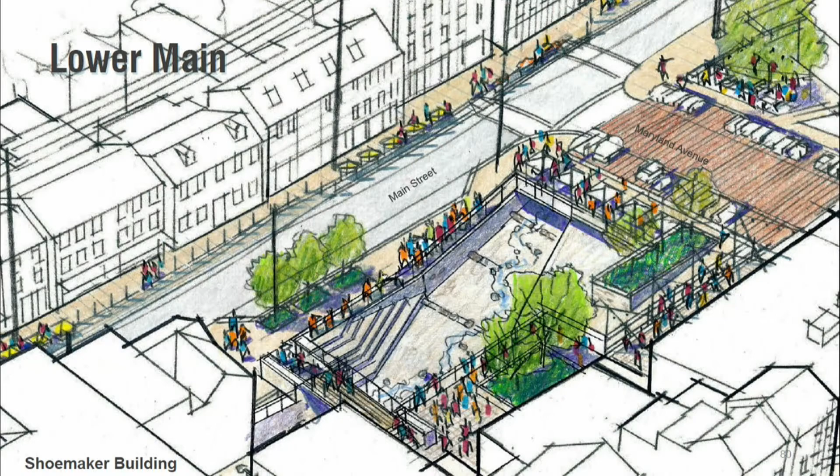That would certainly be encouraged, but it may not be possible. You get a better sense of some of the outdoor gathering area off of Maryland Avenue, and the upper left image is the St. Paul Terrace Park area—quite a nice space. It could become an amenity as well as an emergency access to St. Paul, and some examples from other communities of terraced gathering spaces that lead down to the channel.

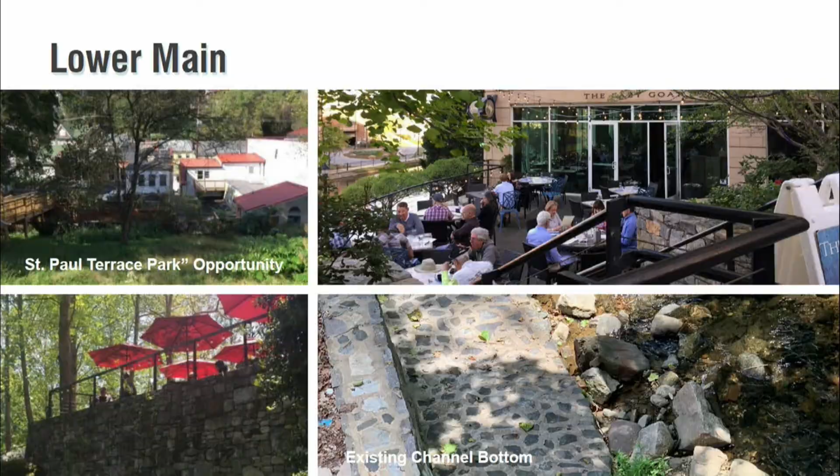Making as much as we can of that space. The bottom shows an existing image of the channel bottom, and we'd recommend using some of these textures—cobbles mortared in place—for some of the channel bottoms, so it's not just concrete and looking like the LA River.

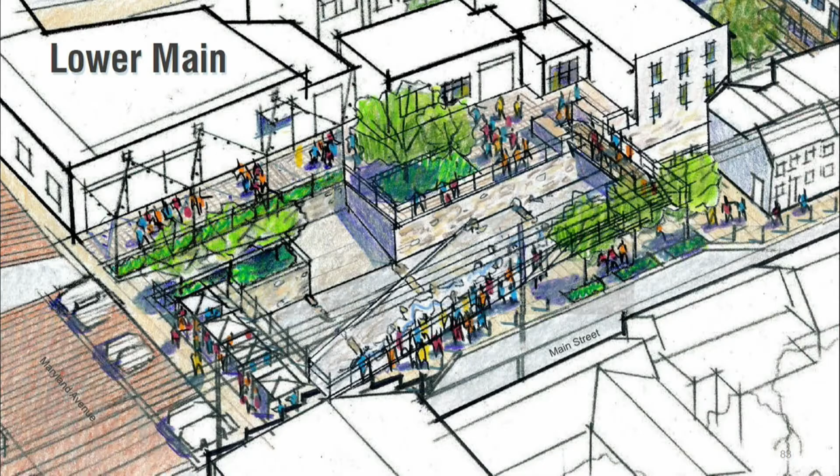You get a sense of how Tiber Alley becomes more of a gathering space, and those buildings along there all of a sudden have very visible facades to Main Street.

This view is kind of a modified version of what we showed last year, but with the 5 additional buildings in place. These are the upper floors of Shoemaker's building that span the channel—the first floor that spans the channel would be removed, and the back halves of the buildings, Kaplan's and the others, would be removed as well. Then that wall for Shoemakers has to be rebuilt.

So we're really recommending that windows be incorporated into that facade. It's going to be a very highly visible facade, so make that a very attractive element—it's going to be very important. But you get a sense of the use of stone for these channel walls, the terraces, the fence, and the bridge crossing that you see here.

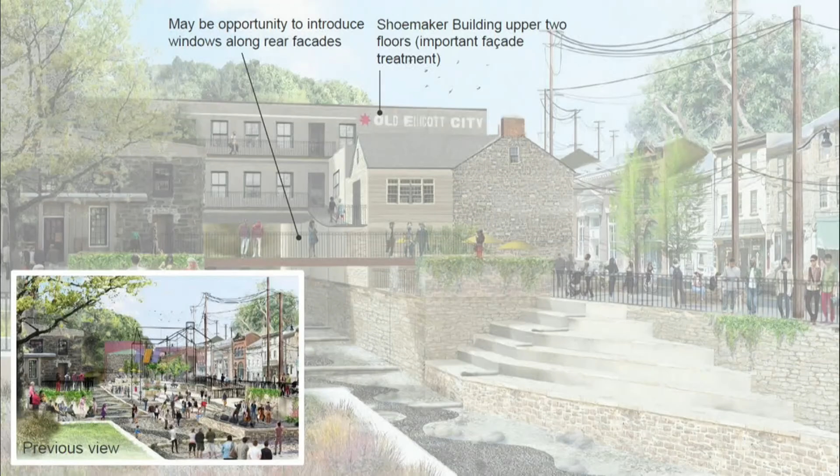The inset is the previous view when the 9 buildings were going to be removed, so you get a sense—it's actually a much more manageable scale of open space with the 4 buildings removed, so we don't feel access to that channel and space is as critical as it maybe was before when it was much larger.

And those facades—we also understand there's an opportunity, not shown here, but on the back side of the wall, to put some higher windows on those first floors where we have the flood wall, so we'll be looking at that. Again, this is a conceptual illustration, not the actual design, but it starts to illustrate some opportunities we have for this area.

Also, with the removal of these lower 4 buildings on Lower Main, it really creates an opportunity to give more visibility to the B&O Railroad Museum.

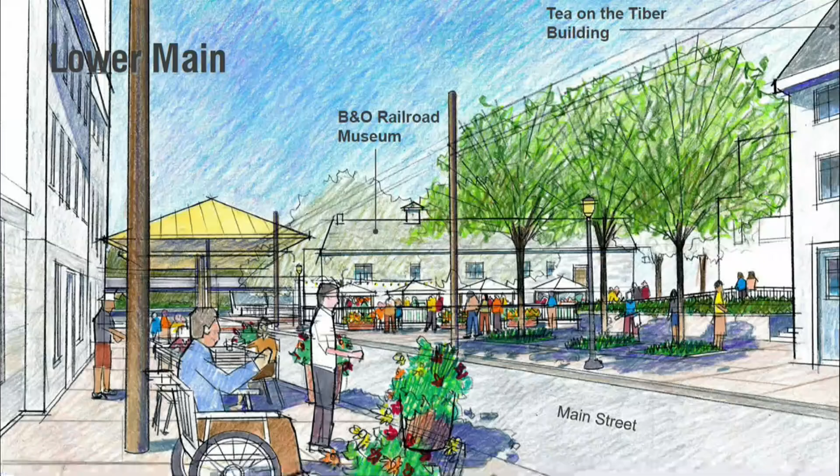This is a sketch showing some of the bump-out areas to make the sidewalks more accessible where they're most narrow, but showing the opportunity for some expanded sidewalk on the south side of Main Street, maybe introducing a couple of trees. We'd probably want to protect these with some bollards so that they're protected from storm debris.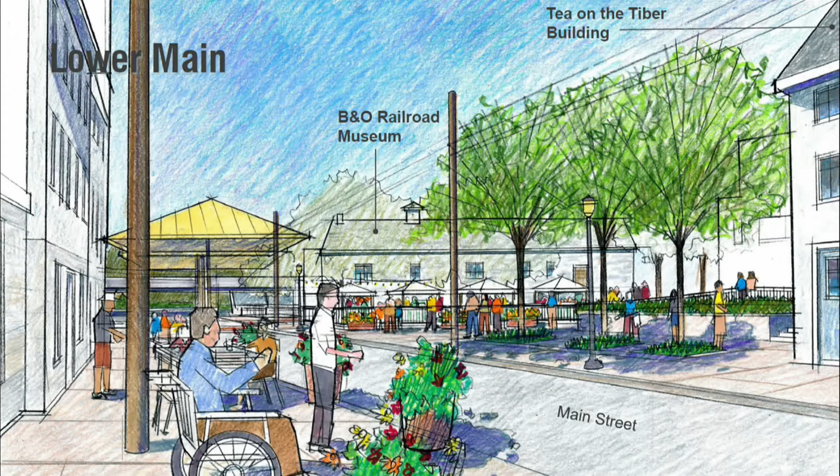It really does show how the B&O Railroad Museum can have a much stronger presence on Main Street, and then you get a sense of some of the broader gathering areas for outdoor dining as well as for fairs and events. As we talked about before, we're not going to prescribe what these are, but there should be opportunities for historic interpretation, whether it's salvaging some remnant foundation walls or marking lines in the channel where foundation walls once were to give a sense of history.

Lastly, as we move to the riverfront, we're going to look at a number of guidelines here. This is the other end of the tunnel, so the tunnel outfall needs to seamlessly blend with its surroundings. We want to minimize the risk to people at the tunnel outfall. We also want to enhance views to the Patapsco River and the B&O Railroad Museum for visitors as they approach Ellicott City from Baltimore County, providing safe and inviting pedestrian and bicycle access between Baltimore County and Ellicott City.

If building a new pedestrian bicycle bridge across the river, this bridge really should be an attraction in and of itself. It should have a signature design that best reflects its context, but it should really be an attraction that makes crossing that river a fun, enjoyable experience.

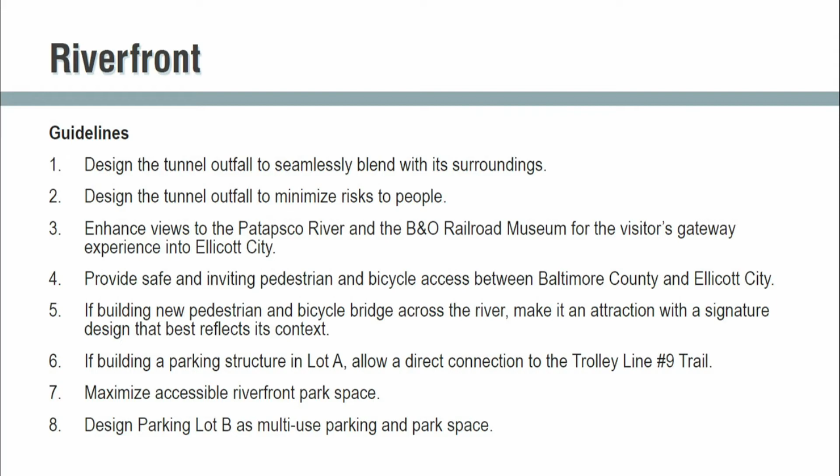This is the area of the river. It's actually quite beautiful. The water was fairly low here. A lot of people were using it. This is the area where generally the tunnel outfall might occur, a series of rock walls and rock outcrops, so engineering that's going to be quite a challenge.

As we go to the plan view, this is showing if there were a parking deck in Lot A, the potential for 3 to 4 levels, an opportunity that has a direct connection to the trolley line trail. This is showing a new pedestrian bike bridge across the Patapsco that would land at the lower Main Street area. We're showing in the blue shaded area the approximate tunnel outfall location. This exact location is still being determined, but it would be somewhere north of parking lot B, and then parking lot B would be really critical for the construction staging and the construction of that tunnel outfall.

We're showing parking lot B. If a deck is constructed in lot A, there may be the potential to convert a good bit of parking lot B to a park space, a riverfront park that's a real signature on the Patapsco, including a combination of soft and hard surfaces that are permeable. There are already permeable parking spaces there now, perhaps in addition to a boardwalk.

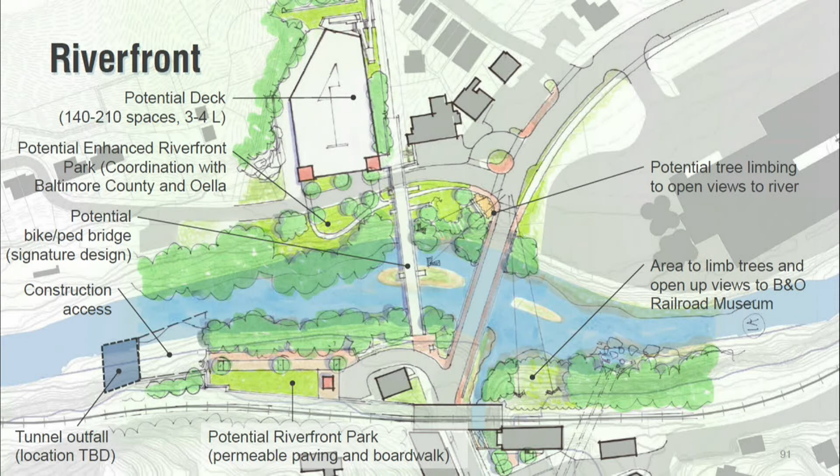Some of the other things we want to identify here are that we heard a lot in earlier meetings about opening up views to the B&O Railroad Museum. So there might be an area on that hillside in front of the museum to limb up some of the existing trees there—not remove them, but limb them up to open up some of the views. The same with the gateway coming in from Baltimore County at the Oella Park. There's some fairly dense river birch at that sign; limbing them up opens up views to the river and makes that river and B&O Railroad Museum part of the identity for Ellicott City and part of the gateway experience.

A scaled back alternative is if parking lot A were to remain surface parking, we'd still want to provide some ADA ramp up to the trolley line trail. But then also the other thing being looked at is, rather than a new separate pedestrian bike bridge, how can the existing Main Street bridge be enhanced—whether it's the existing sidewalks and lane configuration, or is there a bridge attached to that structure that's a separate bike and pedestrian bridge. So that's something that's being explored right now in the county.

And then this is showing the parking lot remaining as a parking lot, but again designed as a flexible space.

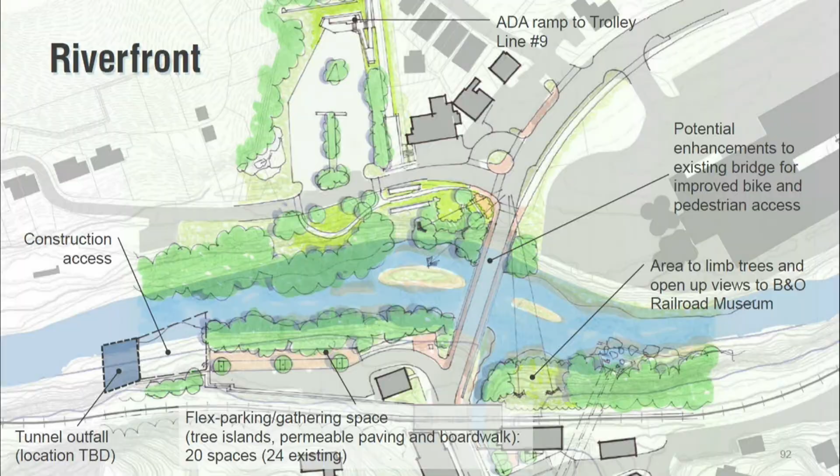So this is an aerial photograph showing the parking deck in Lot A, the new potential bike and pedestrian bridge, some improvements to Lot B as a flexible park and parking lot area, and then zooming in on some of that potential too.

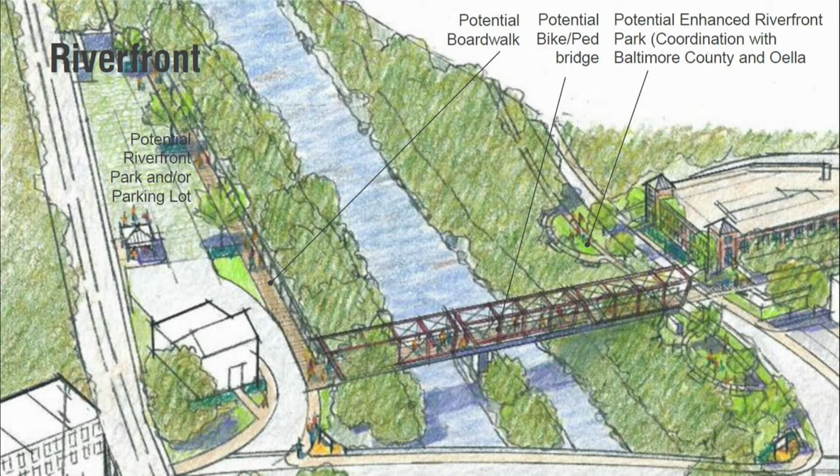Especially if there would be a major parking resource in parking lot A, that experience of getting from parking lot A to Main Street is going to be very critical, that it's an enjoyable experience. And that bridge really should be an attraction in and of itself.

So that was a lot of information to go through. Our next steps: this presentation will be put online, and there'll be a survey and online component developed for this. The county has not developed that yet, so stay tuned on the website for more information. Then we'll go into draft plan preparation after we get comments back on this presentation, and there'll be a draft open house sometime in the winter. So with that, more Q&A. Thank you very much.